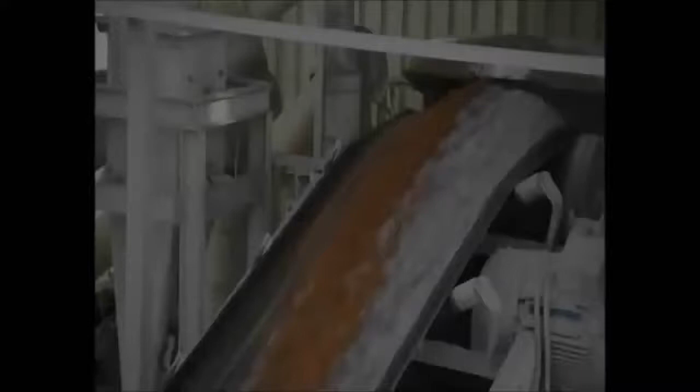Concrete. It's the most used building material on Earth. It was the building block of the Roman Empire. Today, it's the material for a new generation of gravity-defying skyscrapers. The raw ingredients that create this magic formula can be found in nearly every country on Earth.

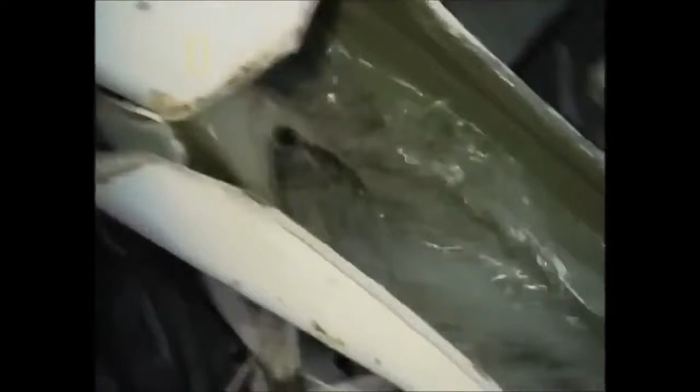Yet how these simple components are mixed together can make the difference between tragedy and triumph. From the mundane to the massive. From the ordinary to the extraordinary. Concrete helped pave the way for innovation and laid the foundation for the world's greatest civilizations. Now, go inside the science of concrete.

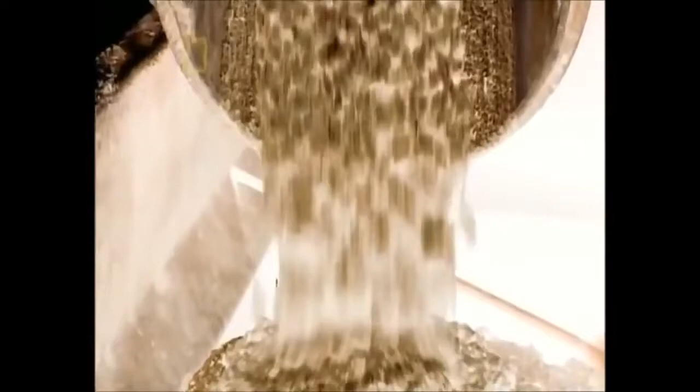It starts out like liquid. When it dries, it becomes stone hard. This amazing metamorphosis has earned concrete the nickname liquid rock. It has served as a cornerstone of engineering for centuries. And it's a highly prized tool of construction for a reason.

It's easy to take concrete for granted. People see it in sidewalks and roads all the time, every day. But in fact, it is the closest thing to a miraculous material in construction that we've ever had. Concrete is everywhere. It has an almost unlimited engineering potential. It can take on nearly any shape and forms the backbone of a variety of the world's construction.

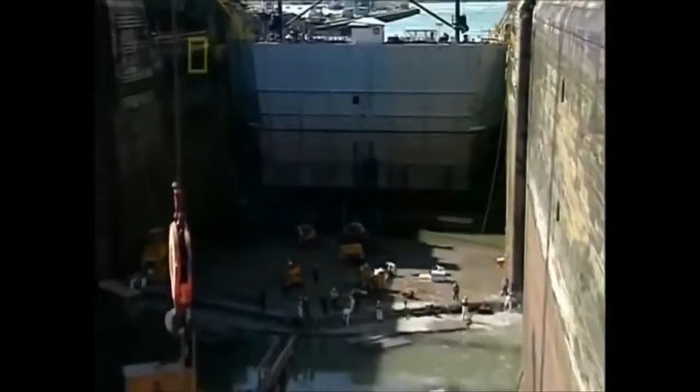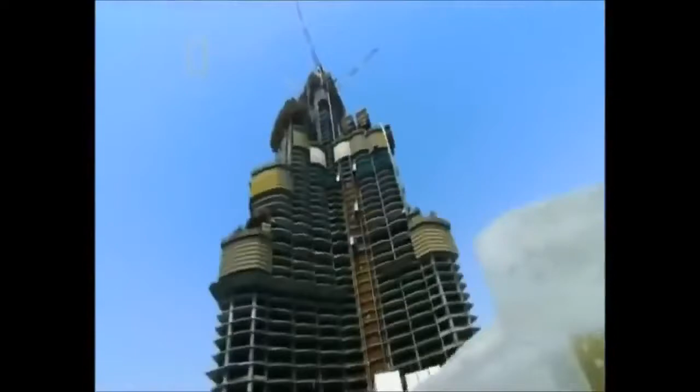Superhighways, massive bridges, man-made waterways, mega dams, the world's tallest skyscrapers. This miracle material begs the question, how does it do it all? I worked on a lot of jobs, and basically they all have a different formula for their concrete. Now, I can't imagine the world without concrete.

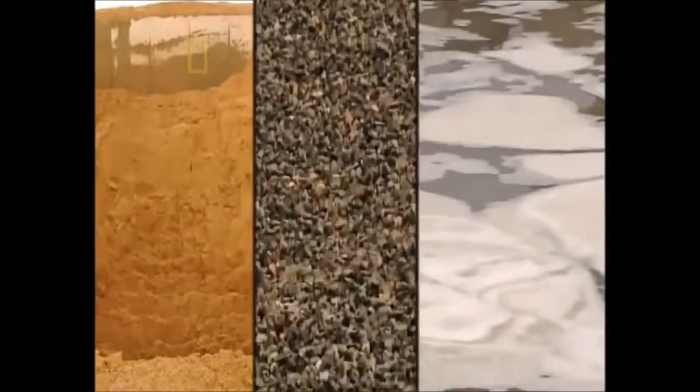The basic formula for concrete is simple. Sand, crushed rock, called aggregate, water, and the heart of the concrete mix, cement. Cement, it is the grey, powdery material that acts as a glue that sticks all of the concrete together. It covers and coats all of the gravel, the sand, and the rock as a way of gluing and binding the whole material together.

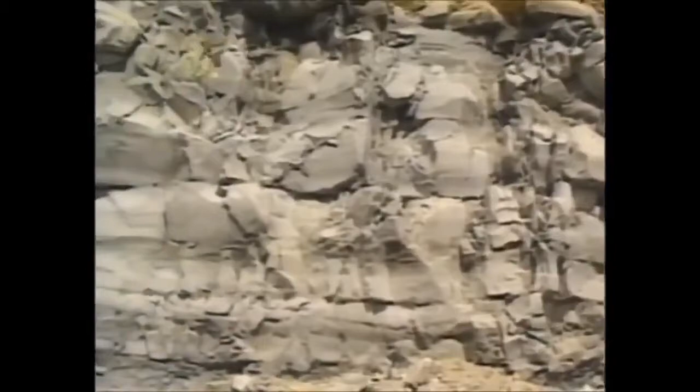To make cement, you need limestone, clay, and other elements like iron. These ingredients are crushed and combined into a powder that's poured into a kiln. The massive cylindrical spinning kilns heat the mixture to a temperature as high as 2,700 degrees Fahrenheit. The mixture becomes partially molten, forming a new marble-sized component called clinker. Once cooled, machines grind clinker into a superfine powder we know as cement.

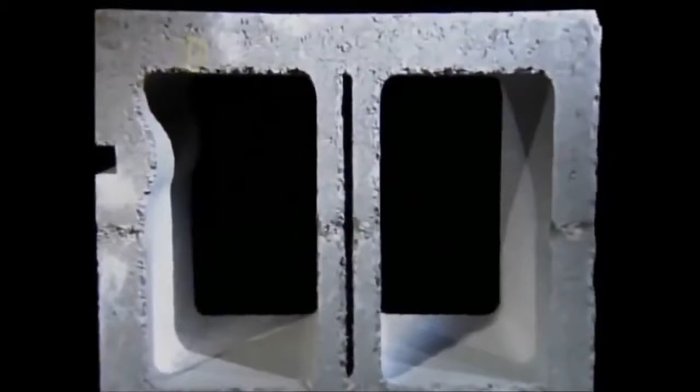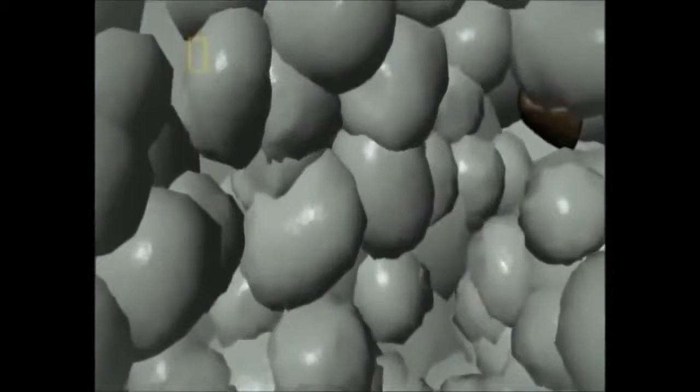Cement binds the ingredients together. When added to sand, water, and crushed rock, the cement reacts, linking the raw elements into one powerful whole. Water is the key. When cement reacts to the water, it undergoes a transformation called hydration. During this reaction, a node forms on the surface of each cement particle. The node grows and expands, linking up with other nodes. It sticks to the crushed rock and sand in the mix. Cement binds these ingredients. As it solidifies, concrete becomes a building block of modern construction.

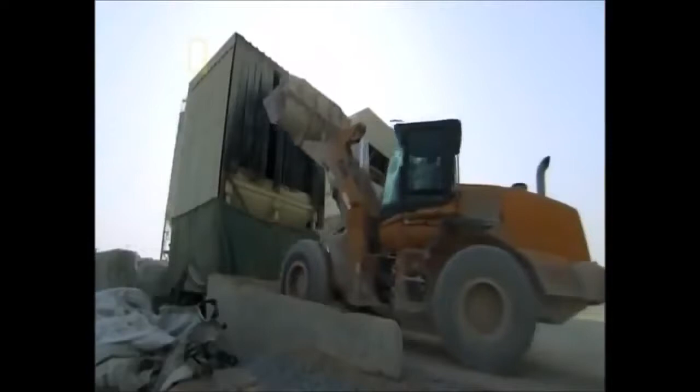This basic process hasn't changed in over a century. But creating concrete is no simple matter. Making the right recipe requires precision and flawless preparation. It is a synergy of ingredients and timing.

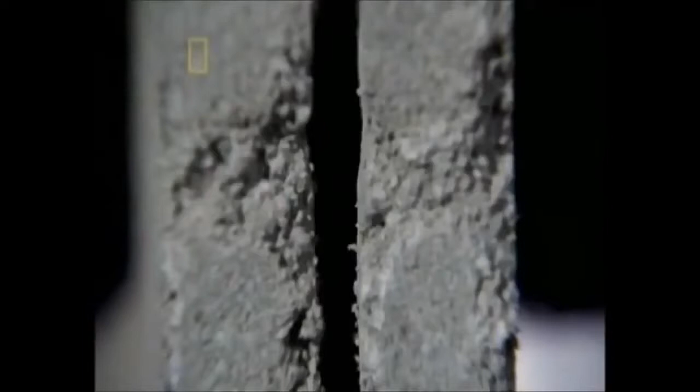In a way, making concrete is like making a cake. There are lots of different recipes to make a cake. You get different flavors, different colors, different textures, but there are also lots of ways that you can make a cake wrong. It's not going to set properly, or it can come out in a way that's very different from your intentions. Getting the recipe right is everything, and the consequences of a flawed mix can be deadly. The residents of Mexico City learned this the hard way.

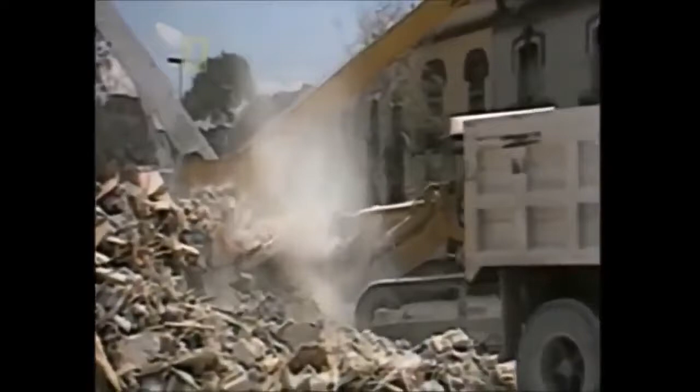On September 19th, 1985, the Mexican capital is rocked by an 8.1 magnitude earthquake. It causes up to $5 billion in damages. Investigation of the rubble reveals that many of the buildings had been made of a substandard concrete.

Yes, we saw examples after the Mexican earthquake where when you use inferior concrete and you skimp on the rebar, and we saw both extensively in Mexico City, the concrete doesn't have its expected strength. The result is walls would fracture and shear and the building would collapse when the expectation would have been that the building should have easily survived to preserve health and safety. The consequences of this quake are tragic. An estimated 10,000 die. Another 50,000 are injured.

But with the right formula, structures made of concrete can endure thousands of years. Although other civilizations, including the Egyptians, experiment with concrete, the Romans transform it from a supporting material to a main substance. In Rome, liquid rock fuels the dreams of an empire. The word concrete even originates in Rome. From the Latin concretus, it means grown together or compounded.

Roman concrete contains the traditional ingredients of sand, water, and crushed rock. But volcanic ash from the hills of Pozzuoli, Italy, transforms the material. The Romans were very astute architects and engineers, and they recognized that by mixing volcanic ash from Lake Pozzuoli in Italy, they were able to get a concrete that became very hard.

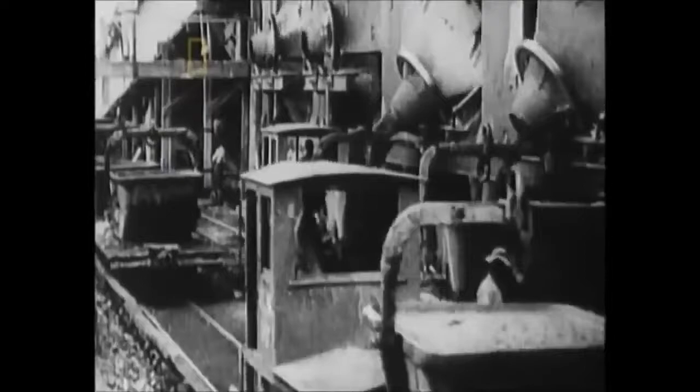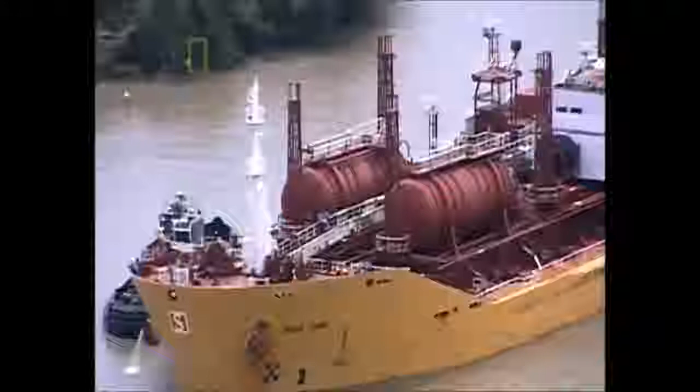Nearly 2,000 years later, builders would ask an almost impossible question. How do you conquer the land mass between two oceans? It holds more than 52 million gallons of water. It cuts a path straight through the heart of a nation. It is safely navigated by more than 12,000 ships every year. The Panama Canal. It's not one of the world's great rivers. It's an entirely man-made waterway. And the material that controls this much water is liquid rock, concrete.

By the late 19th century, the idea of a canal connecting across the isthmus somewhere in Central America had been floated for some time. Before its construction, a trip by boat from New York to San Francisco meant sailing 13,600 miles and crossing through the deadly waters of Cape Horn.

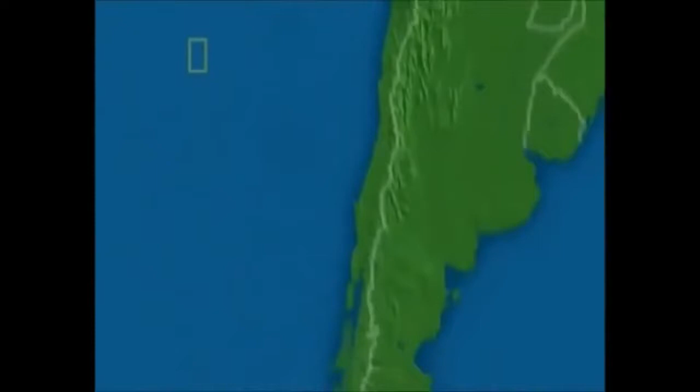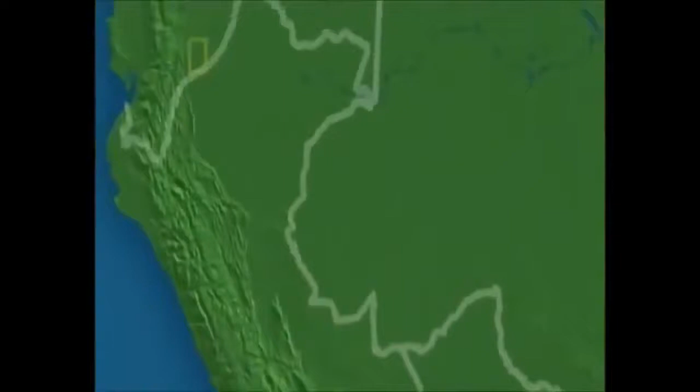The importance of the Panama Canal cannot be underestimated because before it existed, all shipping between the Atlantic and the Pacific Ocean had to take place by going around Cape Horn, which is very treacherous, with very severe storms for many months of the year, and many ships have been lost. The massive storms along the Horn had been sending skilled sailors and precious cargo to the depths of the ocean. The world needs a better route, a safer route. February 1st, 1881.

Ferdinand de Lesseps, the architect who crafted the Suez Canal in Egypt, decides to build another waterway through the country of Panama. Standing in his way are 51 miles of dense tropical jungle, torturous heat, and the fortress-like walls of Panama's central mountain range. How do you cut through the Continental Divide?

Unfortunately, they hadn't talked to the rock. If the devil could have designed a material to plague poor de Lesseps, he would have made this material. As soon as you expose it to air, it oxidized. You'd excavate, and it would slide in. It just ended up to be an impossible project.

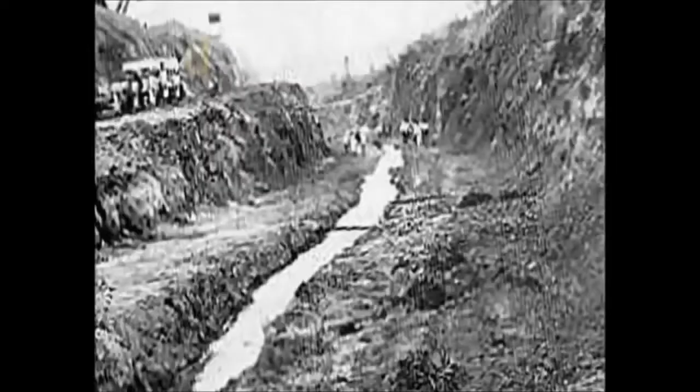De Lesseps' Panama Canal project quickly meets with disastrous consequences. 22,000 workers die due to landslides, tropical disease, and dynamite. After 8 years, the French abandon the canal project. But the French failure is not simply due to disease and the mounting death toll. From an engineering standpoint, their plan is flawed.

With the American economy booming, an ambitious young nation takes over the canal project. President Teddy Roosevelt decides that U.S. workers are up to the task. American engineers learn from the French mistakes. The French tried to carve out a sea-level route through the difficult terrain, just like the Suez Canal. Instead, Americans use a series of chambers known as locks.

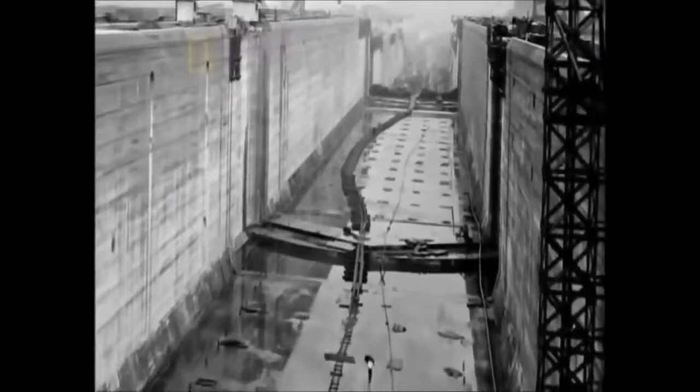Locks are simply big concrete tubs that you put between two bodies of water that have different elevation. You put a concrete tub between them, and the tub has got to be higher than the highest water. And then you put doors on each end of the tub, watertight doors. These chambers with doors fill with water, allowing ships to rise in steps. The ship crosses an artificial lake, then descends along a series of locks to the other side.

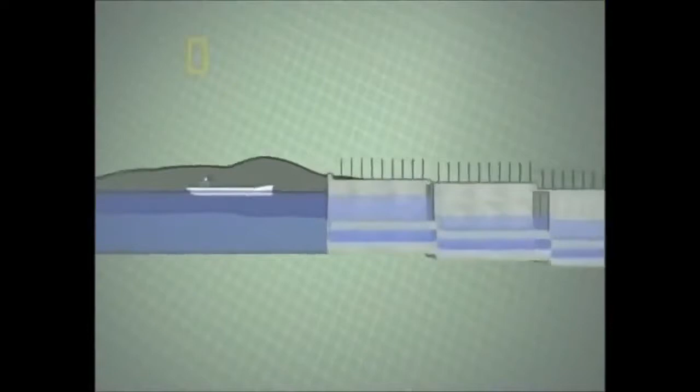It's just a concrete tub with doors on each end that raises things from low water to high water, or the reverse works just fine. You open the high water end, sail in the ship, close the doors, turn on the pipes down here, the ship settles down to the low level, open those doors, and off you go.

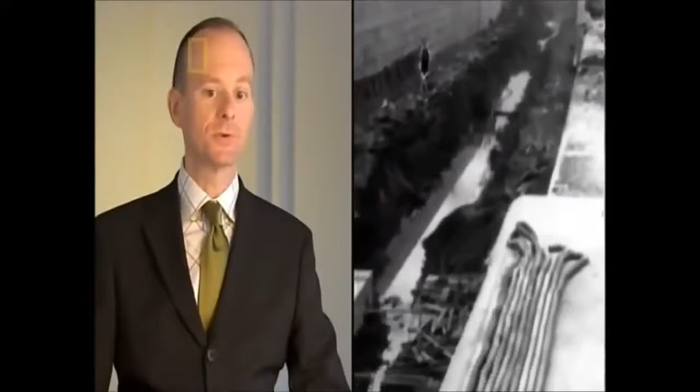With enough concrete, they hope to dam the Chagres River. By redirecting the river, they will feed the artificial lake and fill the locks. And the best option for the locks is liquid rock. Without concrete, the Panama Canal would have been almost inconceivable. Certainly canals had been built before that. It's something that could be done, but at the scale that we were talking about, especially with the goals that they had in terms of timing, it would have been very, very difficult to do that without concrete.

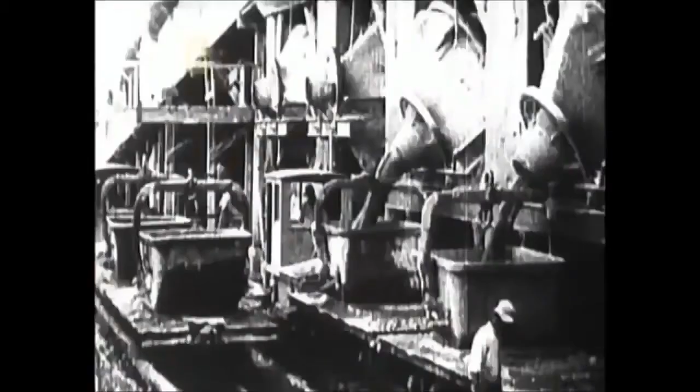The concrete locks will be a stairway bringing ships to the level of the lake. But they will need a high-strength concrete that can hold 26.7 million gallons of water for each lock. That's the equivalent of over 40 Olympic-sized swimming pools. Construction begins in 1904. About 4.5 million cubic yards of concrete were used in the construction of the Panama Canal. And because so much concrete was needed, they had to set 8 on-site batch plants in order to produce that much concrete.

Other materials, like steel or aluminum, can rust or corrode in water. The advantage of concrete is that water can make it stronger. Concrete needs water to complete its chemical reaction. If there's a little extra water around while it's going through the reaction, it just makes sure that all the concrete goes to completion in terms of its hydration. That's the chemical bonding caused by the water between the cement and the aggregate and the sand.

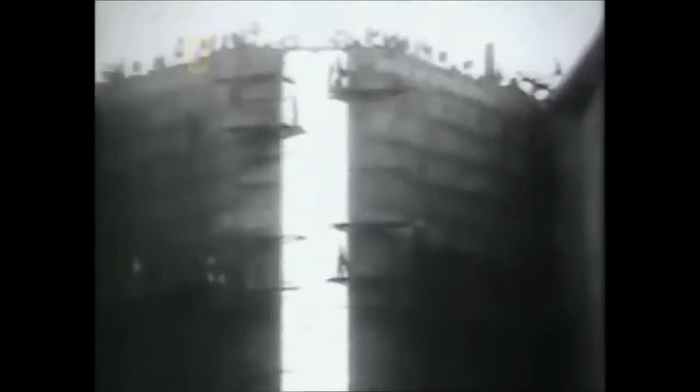In order to prevent leaks, the concrete mix for the locks has to be very dense, not allowing any water to seep through. The concrete that you need to build a canal is not the kind of concrete that you need if you want to design a skyscraper. The recipe for the locks will try to be leak-proof. To solve this problem, builders choose smaller rocks for the aggregate in the mix. Tests show that adding finer aggregate creates a less porous concrete. The goal is a leak-proof lock that only expels water when the doors open.

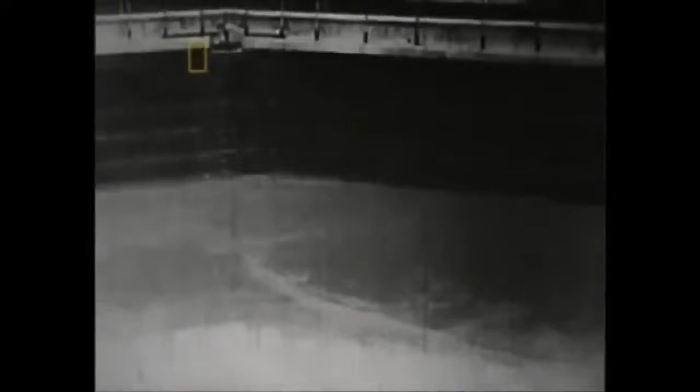With the mix just right, engineers begin building the locks that will control the waterway between two oceans. At the Gatun locks on the Atlantic side, each lock chamber is big enough to hold 3 Statues of Liberty, laid end to end, with room to spare. At these locks alone, workers pour more than 1.53 million cubic meters of concrete. These locks link to the artificial lake made by damming the Chagres River, Gatun Lake.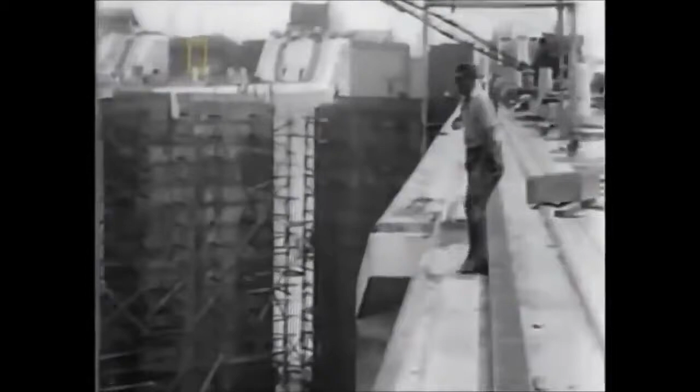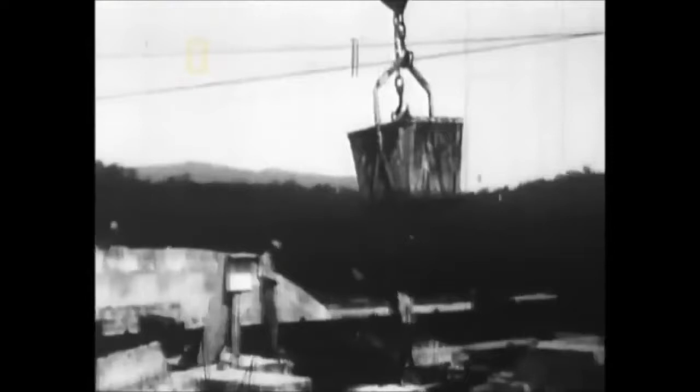9 years of construction. In May 1913, the last bucket of concrete is poured at the Gatun locks. Engineers prepare for the canal's first trial run. The tugboat Gatun travels through the locks on September 26th of that year. The locks work flawlessly and open for business 1 year later.

Few engineering endeavors have changed the geography of the planet like the Panama Canal. After nearly a century in action, the concrete of the Panama Canal has stood the test of time. No other material has withstood wear and tear in the same way. Concrete linked 2 oceans, but an even bigger challenge awaits. How will concrete tame one of America's wildest rivers?

Now go back inside the science of concrete. It has been called an American pyramid. The mighty Hoover Dam is a testament to the power of concrete. Weighing 6,600,000 tons, this concrete colossus holds back 45,000 pounds of water per square foot. The force of this water generates hydroelectric power for over 1 million people.

From the neon lights of Las Vegas to the freeways of Los Angeles, this hydroelectric dam generates 2,080 megawatts of electricity. The Hoover Dam's construction redefined what the world could do with concrete, but it also rerouted one of America's greatest rivers, flooding ancient canyons, reshaping the area's natural habitat.

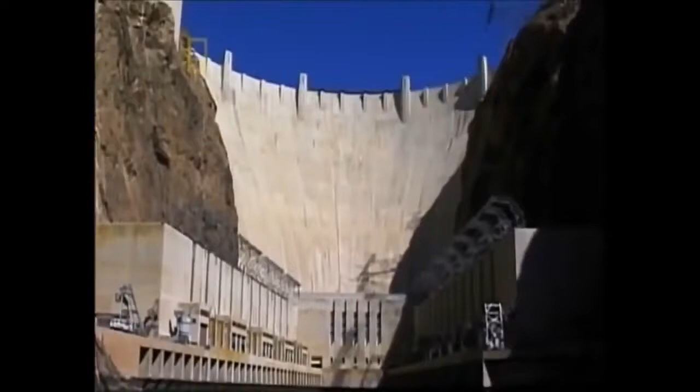The dam needs a material that is strong enough to hold back the raging Colorado. And since the location would be remote, able to be made on site. One material can meet all of those requirements. It's hard to imagine the Hoover Dam being built out of any material other than concrete. Using steel on this scale would be too costly. But to make the Hoover Dam, engineers would need more concrete than had ever been used before in one project.

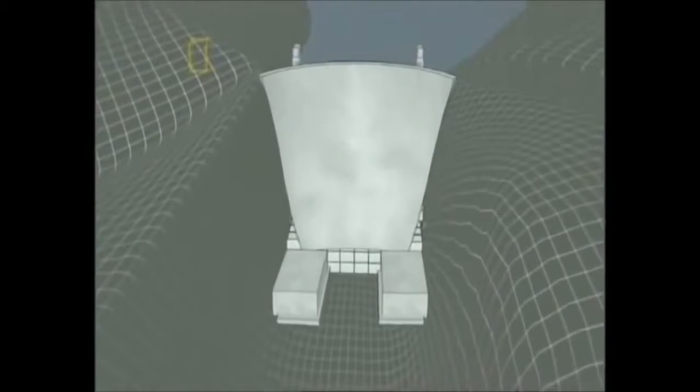The dam will be 726 feet high and 1,244 feet wide. With a structure this big, it will be impossible to do one massive pour of concrete. The amount of material that went into this dam was so enormous that there's no way to pour the concrete in one segment. So what they did is they divided the whole dam into lifts and then into individual blocks.

The Hoover Dam needs to be built as a series of individual blocks that will interconnect. Trapezoidal in shape, the blocks rise in 5-foot lifts. This crucial engineering element allows the project to progress in stages. Something on that scale being built in concrete had not been built before.

Hundreds of pounds per square inch, thousands of pounds per square foot on the base of the dam, trying to push the dam downriver. And now you've got the Hoover Dam to stand this incredible water pressure trying to push it down the river. Chief Engineer Frank Crowe knows the completed dam will have to hold back 45,000 pounds per square foot of water. For this, they need a special high-strength formula.

Crowe's solution? A minor but crucial modification to the standard concrete formula. A very dry mix, one that uses less water. More water makes it more workable, but shrinks more, and shrinkage causes cracks. The less water, down to 7%, the better and stronger the concrete.

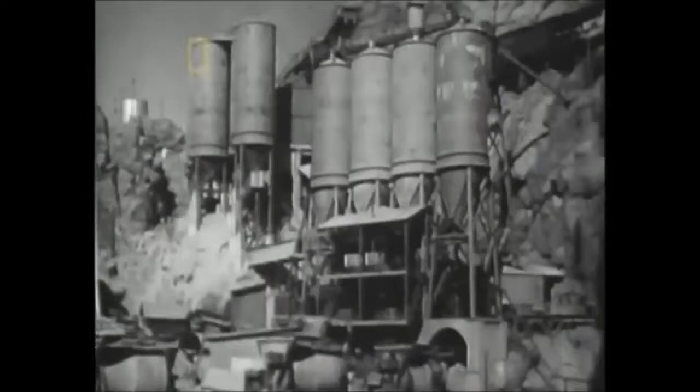The dam's remote location also means crews will have to build 2 concrete mixing plants on site. Shipping a very dry concrete formula from a facility far away would render it useless by the time it's transported to the dam. Because speed is of the essence when working with a very dry concrete mix, the crews working the pouring cranes have to push themselves to the limit to pour quickly and accurately.

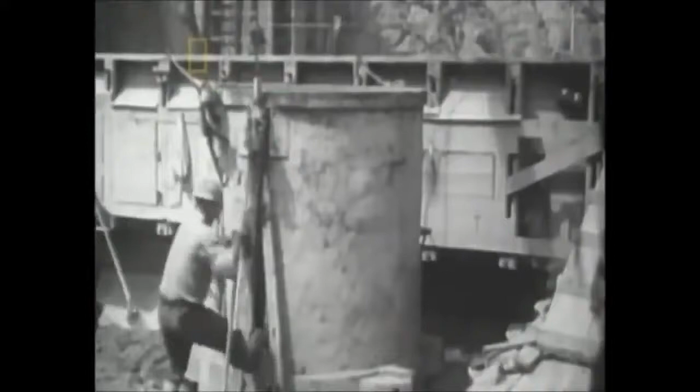When concrete cures, it gives off a powerful heat, a result of the cement and water reacting to make the rock-hard substance. The process by which concrete cures we call an exothermic reaction. By that I mean it gives off heat. And indeed, if someone pours a sidewalk or driveway around you, right after the slab dries enough to touch, put your hand on it. It'll feel warm. That exothermic, it gives off heat. You can feel sensible heat.

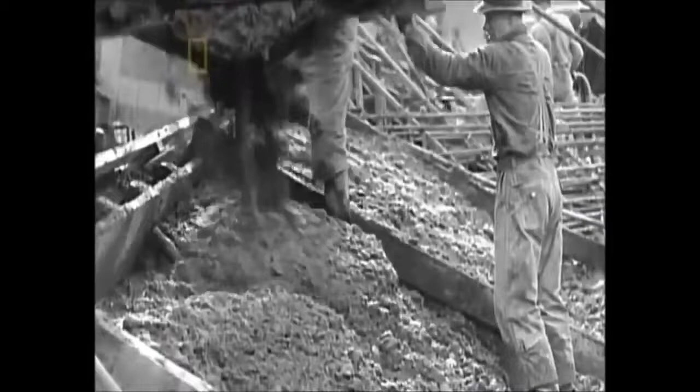As the amount of concrete going through this chemical reaction gets bigger and bigger, the amount of heat that's given off gets bigger and bigger. Engineers calculate that if the dam were built in one continuous pour, the concrete would get so hot that it would take 125 years for it to cool to normal temperatures. The extreme heat would also cause the concrete to crack and crumble away.

Concrete dries from the outside in. If the concrete is not evenly cooled, it can crack, putting the stability of the whole structure at risk. Instead, Frank Crowe and his team of engineers have an innovative solution. Each block is outfitted with coils of thin-walled steel pipe. When the concrete is first poured, water from the Colorado River circulates through these pipes.

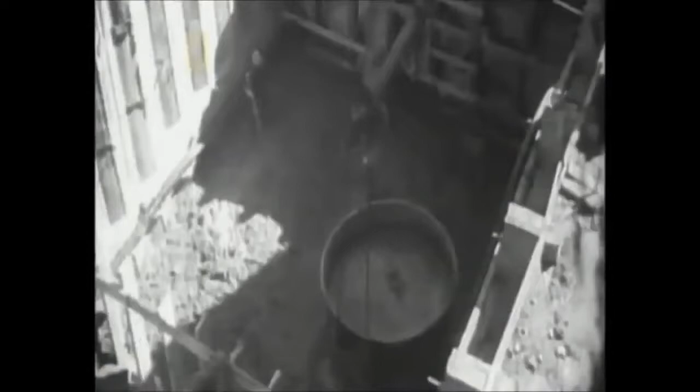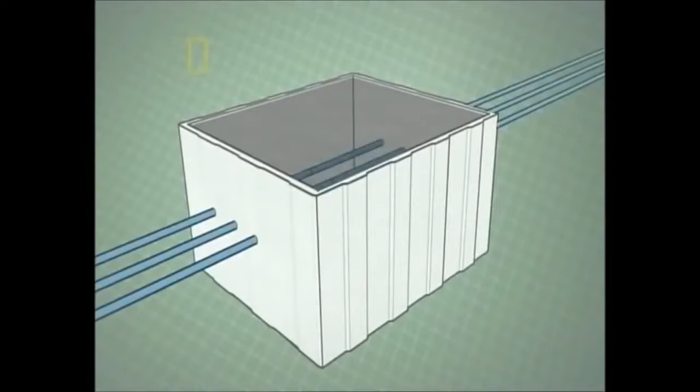The idea is to initiate a cooling process, but one done in stages. Cooling the concrete too quickly will cause it to crack. After the concrete has received its initial cooling, chilled water from a refrigeration plant is circulated through the coils to finish the cooling process. As each block is cooled, the pipes are cut off, and they are filled with grout by pneumatic grout guns, pumping 300 pounds per square inch of filler.

Once the individual blocks have cooled and set, there is one final challenge. In order to prevent the hairline fissures between the blocks from weakening the dam, the individual blocks are formed with vertical interlocking grooves. When the concrete has cooled, grout is forced into these joints, bonding the entire structure into a monolithic concrete giant. This method takes advantage of one of concrete's fundamental properties. Concrete as a material is very strong in compression.

To build a structure, to make sure that the concrete is all in compression, you bend the beam like this, so now the water pushes on an arch. Well, what's the water trying to do? It's trying to push that through. Well, it's the Pantheon Dome again. Only this time it's the water trying to do it. It's trying to push the dome through the river gorge. What that does is put the whole structure in compression.

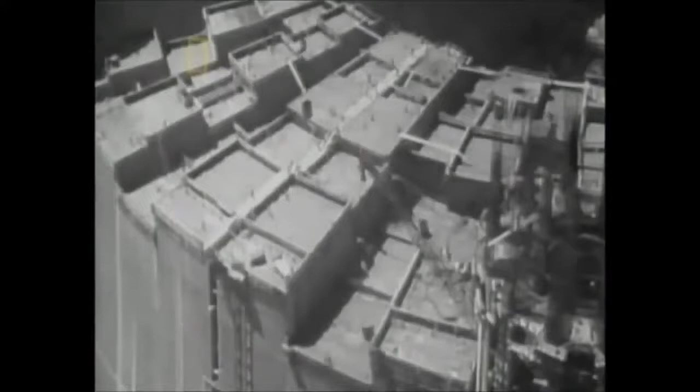Well, concrete loves compression. The more it is forced together while setting, the stronger concrete becomes. As a result of this property, the Hoover Dam is arguably stronger today than it was on opening day, 70 years ago. The Hoover Dam is a testament to engineering know-how and a skillful use of concrete.

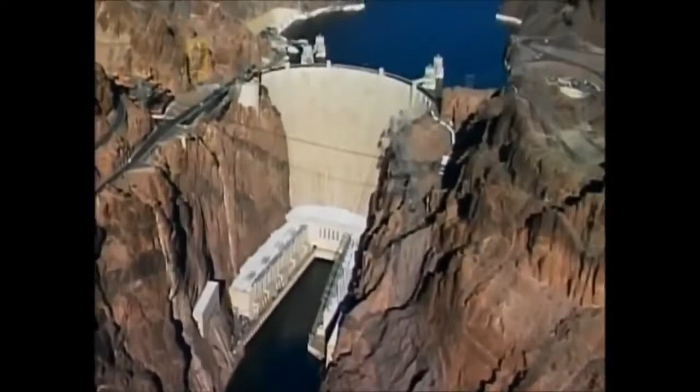The dam contains enough concrete to pave a strip 16 feet wide and 8 inches thick from San Francisco to New York. More than 5 million barrels of cement were used in the Hoover Dam, and a total of 21,000 men worked on its construction. And it represented an enormous engineering achievement to build successfully. It took the lives of over 100 men to build that dam.

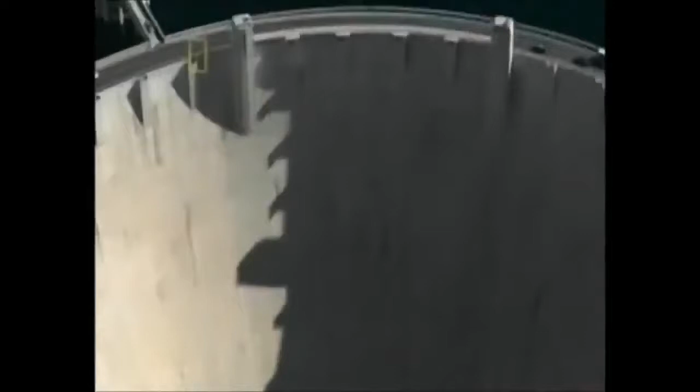Today, the concrete mega dam is nothing new. But Hoover set the stage and showed the world that concrete could do the job and help generate much needed power. It changed the course of one of America's wildest rivers. Now the question is, can concrete conquer the skies?

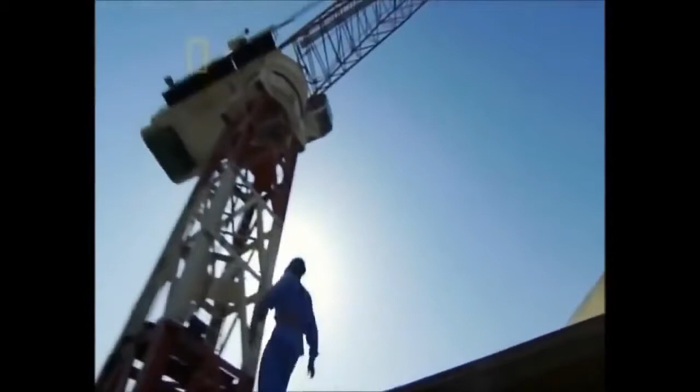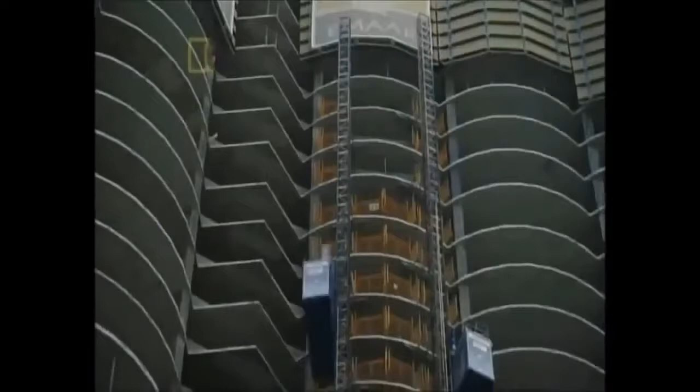In the scorching Persian Gulf, a growing structure cuts the horizon. Its expected height is a closely guarded secret, but experts around the world agree the Burj Dubai may be the world's tallest skyscraper. It'll be the tallest building, for sure, the overall title holder for some time to come. A construction project this massive needs 11 cranes and the world's fastest high-capacity construction elevators. The building rises at the breakneck pace of 1 floor every 4 days.

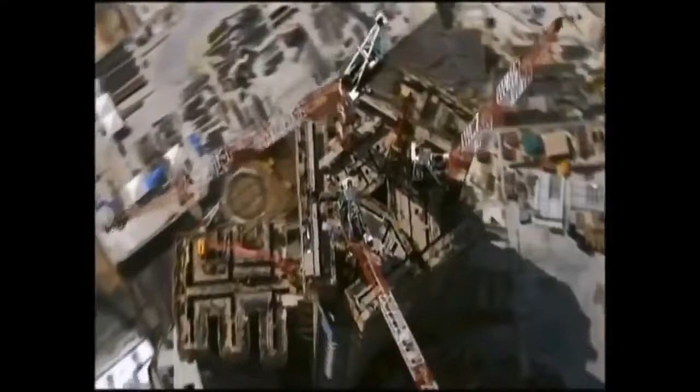And from the walls to the floors, to the columns to the stairs, much of this desert skyscraper is concrete. More than 160,000 cubic meters of it. At more than 2,000 feet, the Burj Dubai will be the crown jewel of the United Arab Emirates and is a shining example of a new generation of skyscrapers that seek to dominate the skies. It is a far cry from the humble beginnings of the concrete skyscraper, more than a century ago.

At the beginning of the 20th century, the building material of choice was not concrete, but steel. You can build a hell of a skyscraper with steel. In fact, the Empire State Building is so overbuilt, you could probably add another 30 stories to it under today's building codes, and it would still comply fine. So steel was a great material. You can build a great building from steel, but it's an expensive way to go.

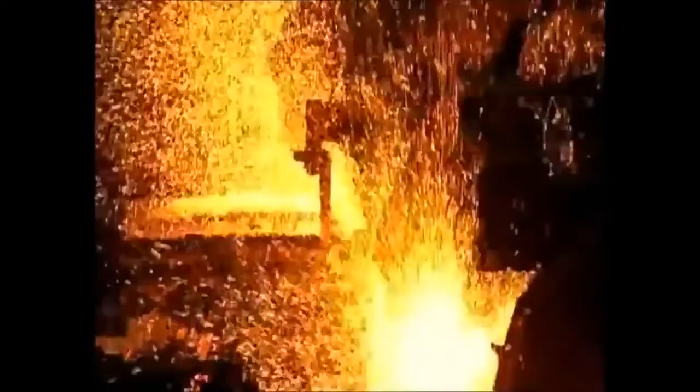And steel is not only costly, but represents a challenge for a new generation of skyscrapers that grow increasingly higher. And if you're going to go tall, the building's got to be stiff. It is so much easier to make those thick, stiff walls from reinforced concrete than steel that it's a no-brainer. The Petronas towers in Malaysia are concrete, and this new one in Dubai is going to be concrete. If you're going to go that high, it's going to be concrete.

The stiffness of concrete, combined with its availability and relatively low cost, have made it the building material of choice for these new skyscrapers. As our experience and comfort level with reinforced concrete came along, and as the buildings started getting taller, reinforced concrete really became the material of choice.

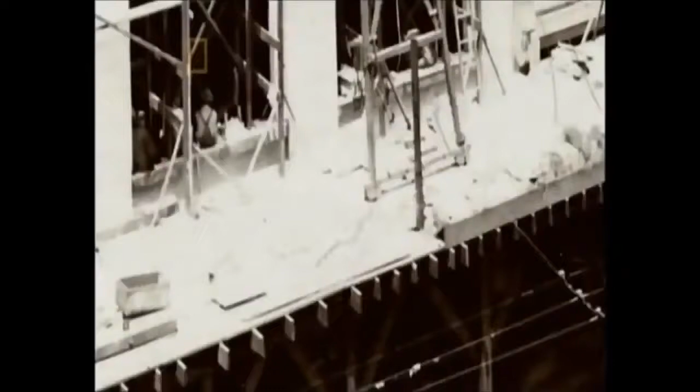Before 1902, the tallest steel reinforced concrete building is a paltry 6 stories tall. The Ingalls building in Cincinnati changes that. Engineer Henry Hooper dreams of a monolithic building of concrete, a skyscraper 16 stories tall. But many engineers believe that a concrete tower 16 stories high will collapse under strong winds or even its own weight. When Hooper finishes his building, there are many skeptics.

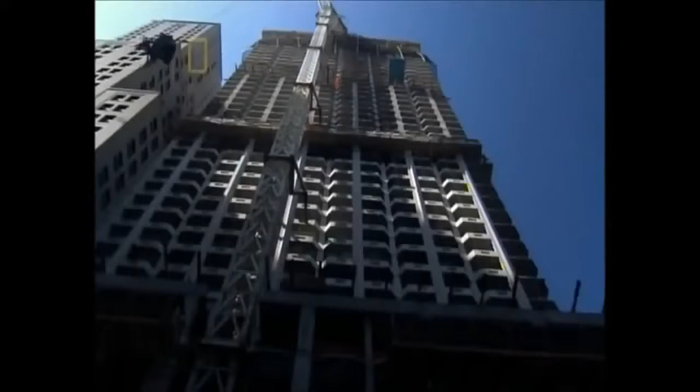There's one anecdote that says that a reporter actually stayed up all night waiting for the Ingalls building to collapse because he was so certain that it was going to. Needless to say, the reporter was disappointed in the end. It is a towering success for its time. But at 210 feet, it is just one in a dizzying array of modern-day skyscrapers. More than a century later, the towering dream of Dubai aims to be over 10 times the size of the Ingalls building.

Every morning, workers assemble in the garage of the building. Erecting this much concrete in the punishing heat of the Gulf requires serious manpower. But before workers can pour a drop, the perfect formula needs to be mixed at the batch plant. The first problem this leviathan from the desert faces is its own height. The taller a building, the more it flexes, increasing the likelihood that it could flex to the breaking point, a deadly proposition. Older skyscrapers like the Empire State are safe because they use massive steel beams and braces. But erecting a tower nearly twice as high requires a material with even greater shock-absorbing qualities.

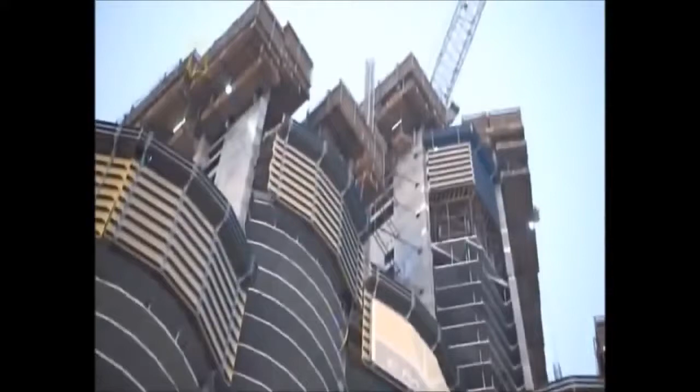If you take something like the Empire State Building and the wind blows on the Empire State Building, well, the wind creates pressure, which are going to try and bend the Empire State Building over. But as you go higher, imagine now going twice the height of the Empire State Building. The wind gets more surface to work on. Indeed, buildings collapse when the flex is so great that the weight of the building gets outside of its footprint and the building doesn't have strength enough to handle that. Down it comes. Builders will need a formula that is almost as strong as cast iron, yet more resistant to damage due to vibrations from the wind.

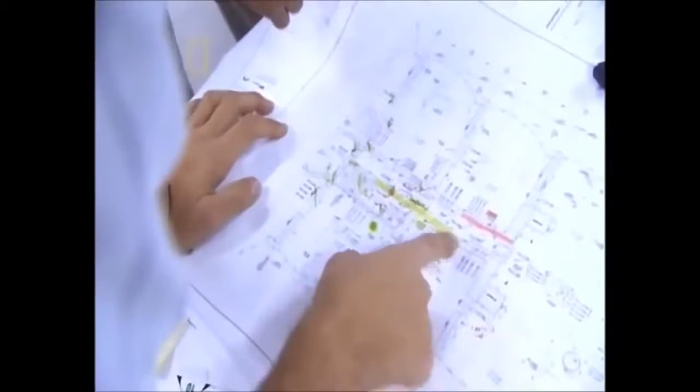After extensive computer and wind tunnel testing, the architects behind the Burj Dubai will use a high-strength concrete formula. It contains slag, a byproduct of the steel industry, and microsilica, which gives the concrete added strength. If you look at the microstructure of concrete, there are many, many spaces between the particles that are either hollow, so we call them pores, or they are filled with water. Microsilica plays the role of filling these pore spaces between, and therefore it makes concrete much more dense, more durable, and stronger.

And in order to make sure that the formula is consistent, Alam Feroz, quality control manager for the concrete of the Burj Dubai, routinely tests the concrete before it is used in the skyscraper. I'll give you an example. It's like if you're giving blood to a patient, so how important is the blood to be tested before you give it to the patient? It's a big risk. So same is with the concrete. When it has been tested, I get confident that whatever I'm giving to the structure is tested and it complies to the requirements. It won't be just a mere guess.

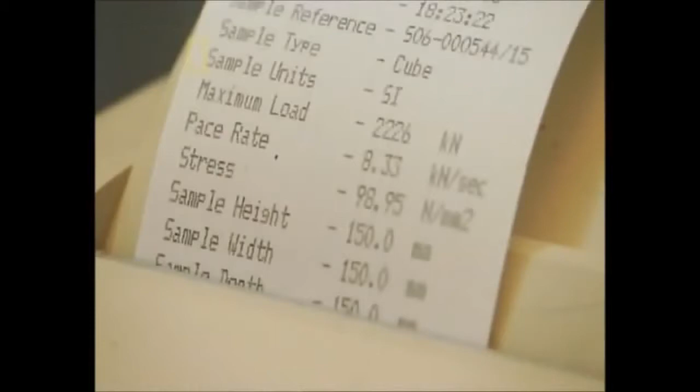To test the strength of the concrete, small cubes are hardened in cool water. Next, the concrete is deposited into a crusher for a stress test. This cube holds up to nearly 14,000 pounds per square inch, making it a high-strength concrete. The concrete test has been successful. But as strong as this formula is, it still has to contend with desert heat. Temperatures top 120 degrees. How do you keep concrete cool in the desert?

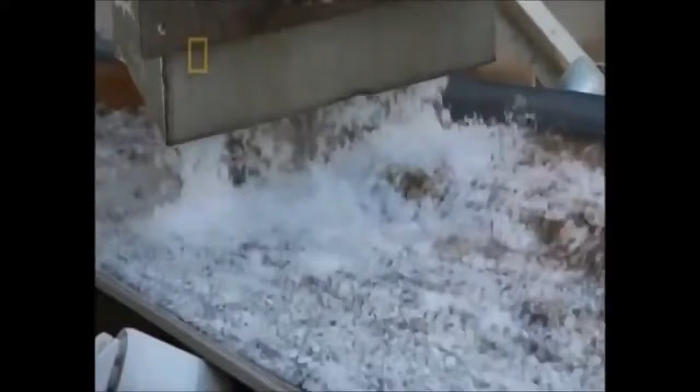But the building's guts are solidly concrete. When it's finished in 2008, the Burj Dubai will be the tallest building in the world. Like the Ingalls, the Burj Dubai has set the standard for its day, showing once again that concrete can be used in a variety of ways for the world's tallest buildings.

Now, reinforced concrete is establishing itself as a building material of choice for skyscrapers. Concrete has conquered the skies. Concrete's next quest: how to tackle the building challenges of the future.

Concrete has been a key ingredient in the construction of our civilization. It has been a fundamental part of our architectural past and is now paving the road for our future. Scientists are developing new formulas for concrete and are looking for ways to make it stronger, more environmentally friendly, and capable of doing things we never thought possible.

Back where it all started, at the heart of the Roman Empire, concrete has taken a new and exciting turn. Just a few miles from the Pantheon, the Jubilee Church, designed by architect Richard Meier, uses a new form of concrete. The church was commissioned by the Archdiocese of Rome to commemorate 2,000 years of Christianity.

For that, the building would need a material that was both ancient and modern, a material that would speak to the church's past and make a bold statement for the future. They would also need a material that would last the test of time. Concrete fits the bill. This church is remarkable for several reasons.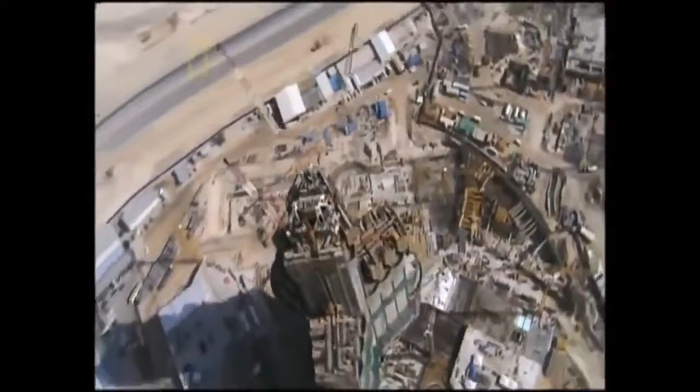New developments in concrete technology now allow for what used to be unthinkable: helping the environment by using an unusual aggregate: glass. The innovation here has been in making sure that the glass doesn't get corroded by the lime in the cement mixture. One of the biggest issues with concrete is that the Portland cement tends to be quite corrosive, and this has been a big problem with things like recycled glass. It tends to corrode the glass, and it falls out.

This composition of cement was actually developed by Columbia University. It is a much less corrosive, more benign cement, allowing you to put the glass chips in. So you can actually now have concrete with glass chips that actually has a good surface effect.

We are generating millions of tons of garbage, solid waste, and in New York City, approximately 6% of all solid waste is glass. That's bottles like this, yeah. And these bottles generally find their way into landfills. And that costs taxpayers hundreds of millions of dollars just to get rid of these bottles.

Concrete's versatility allows it to bind with other materials, in this case, glass. The first step is to separate the bottles by color. And then you crush them in a crusher. Now, crushed glass is something like this.

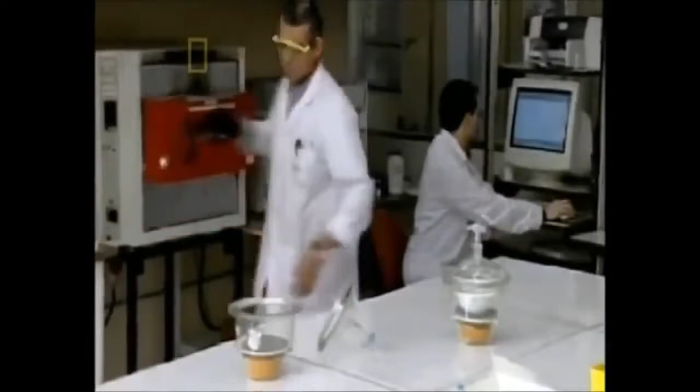So if you put this finely ground glass powder into concrete, you can replace part of the cement by this glass. These are actually 100% recycled glass pieces added into the concrete. Initially, scientists thought that recycled glass would make for a bad aggregate. But Professor Meyer and his team have found a way.

Okay, so once you make concrete out of these glass particles and color coordinate that very well, then you can get something like this, and this is now already being commercially produced. That's the way regular concrete would look. And this is here our glass concrete, polished to a high grade of polishing. That is known as terrazzo concrete.

Using recycled glass as an aggregate is just one of the many ways that concrete continues to reinvent itself. It also may pave the future for a more environmentally friendly concrete. There are also other developments reshaping concrete for the future. For the last 100 years, architects and builders have sought a way to allow light into concrete buildings, homes, and offices in a more efficient manner.

One of concrete's biggest drawbacks is that it creates dark buildings that do not effectively conduct light. Experts are working to change this. Okay, this is a piece of light transmitting concrete. It seems like an odd concept, but what they've done here is to take standard concrete and add glass fibers.

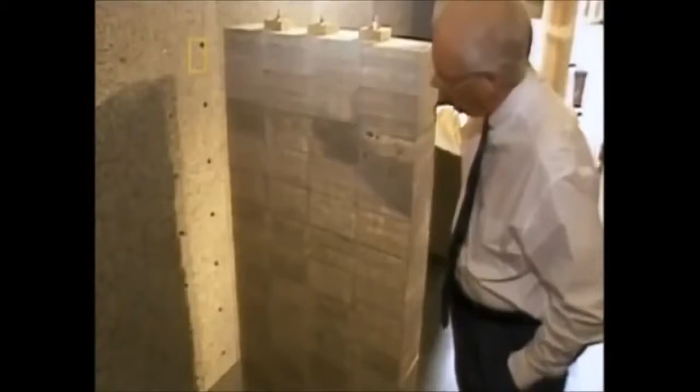Okay, so what you're seeing here is the blue LED passing through the glass fibers that are embedded in the concrete. Imagine concrete allowing light to pass right through it, or for someone to cast a shadow through a concrete block. This same thing can happen with normal daylight as well. So the idea is that you can build a structure with this concrete and allow daylight to actually come through the structural element of the concrete.

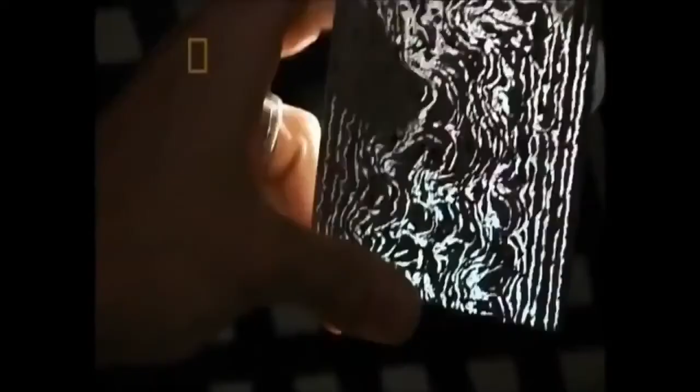Light transmitting concrete, or LiTraCon, is a unique form of concrete that uses glass fibers to conduct light. It allows for massive structures to permit light to shine through. This technology has the potential to redefine what concrete looks like. Once considered cold and impersonal, these new forms of concrete are transforming the material. What started off as the most basic of building materials is now on the cutting edge of building and design.

The future for concrete is virtually limitless. If concrete is anything, it is a material that continuously reinvents itself. Concrete continues to adapt to the emerging challenges of our world and is laying the foundation for our future.

Concrete. This innovation allows the Romans to craft an empire from the ground up. Concrete becomes the backbone of a dizzying array of structures, aqueducts, bathhouses, and markets. But today, one structure alone stands as a unique testament to the power of ancient Roman concrete: the Pantheon.

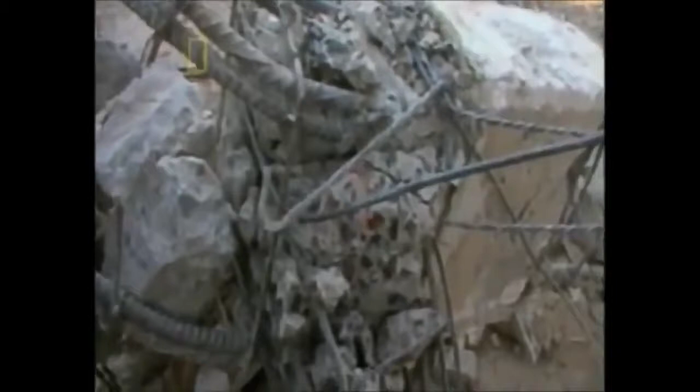Yes, we saw examples after the Mexican earthquake where when you use inferior concrete and you skimp on the rebar, and we saw both extensively in Mexico City, the concrete doesn't have its expected strength. The result is walls would fracture and shear and the building would collapse, when the expectation would have been that the building should have easily survived to preserve health and safety. The consequences of this quake are tragic. An estimated 10,000 die. Another 50,000 are injured.

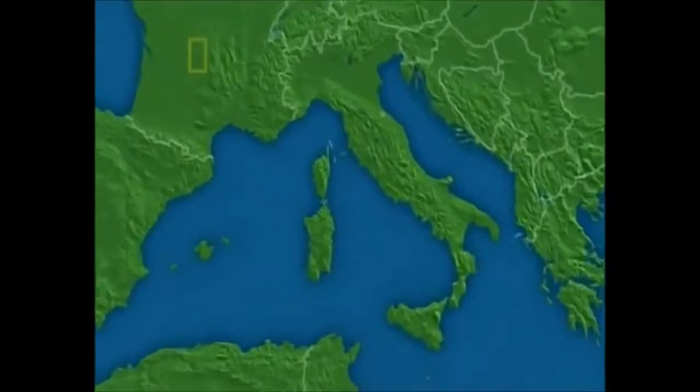But with the right formula, structures made of concrete can endure thousands of years. Although other civilizations, including the Egyptians, experiment with concrete, the Romans transform it from a supporting material to a main substance. In Rome, liquid rock fuels the dreams of an empire. The word concrete even originates in Rome. From the Latin concretus, it means grown together or compounded. Roman concrete contains the traditional ingredients of sand, water, and crushed rock. But volcanic ash from the hills of Pozzuoli, Italy, transforms the material.

The Romans were very astute architects and engineers, and they recognized that by mixing volcanic ash from near Pozzuoli in Italy, they were able to get a concrete that became very hard. This volcanic ash proves to be an adhesive binding agent. It gives ancient Rome a powerfully strong concrete. Massive bridges, man-made waterways, mega dams, the world's tallest skyscrapers. This miracle material begs the question, how does it do it all?

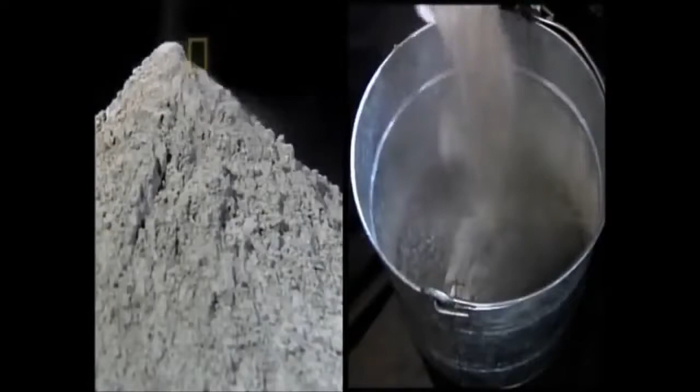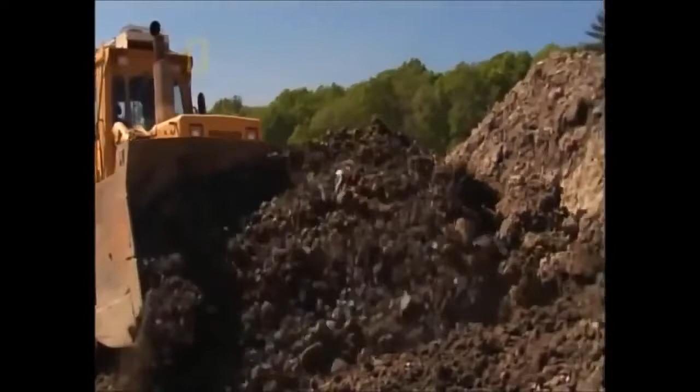I worked on a lot of jobs, and basically they all have a different formula for their concrete. Now I can't imagine the world without concrete. The basic formula for concrete is simple. Sand, crushed rock, called aggregate, water, and the heart of the concrete mix, cement. Cement, it is the grey, powdery material that acts as a glue that sticks all of the concrete together. It covers and coats all of the gravel, the sand, and the rock as a way of gluing and binding the whole material together. To make cement, you need limestone, clay, and other elements like iron.

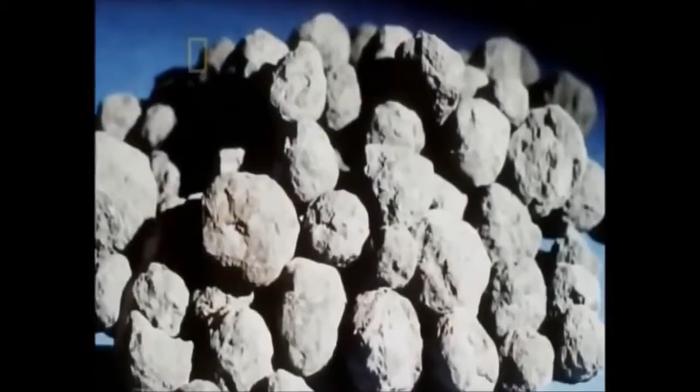These ingredients are crushed and combined into a powder that's poured into a kiln. The massive cylindrical spinning kilns heat the mixture to a temperature as high as 2,700 degrees Fahrenheit. The mixture becomes partially molten, forming a new marble-sized compound called clinker. Once cooled, machines grind clinker into a superfine powder we know as cement. Cement binds the ingredients together when added to sand, water, and crushed rock.

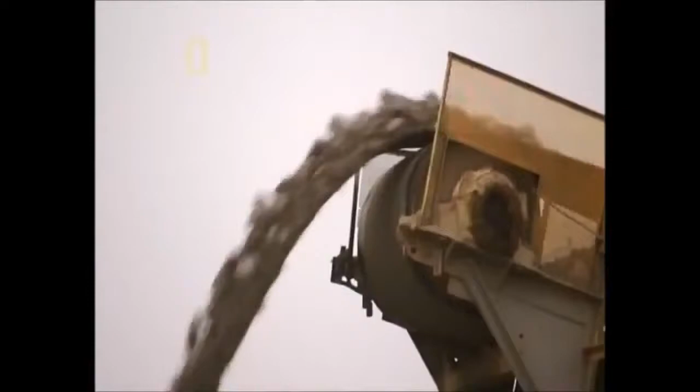Concrete. It's the most used building material on Earth. It was the building block of the Roman Empire. Today, it's the material for a new generation of gravity-defying skyscrapers. The raw ingredients that create this magic formula can be found in nearly every country on Earth. Yet how these simple components are mixed together can make the difference between tragedy and triumph. From the mundane to the massive. From the ordinary to the extraordinary. Concrete helped pave the way for innovation and laid the foundation for the world's greatest civilizations. Now, go inside the science of concrete.

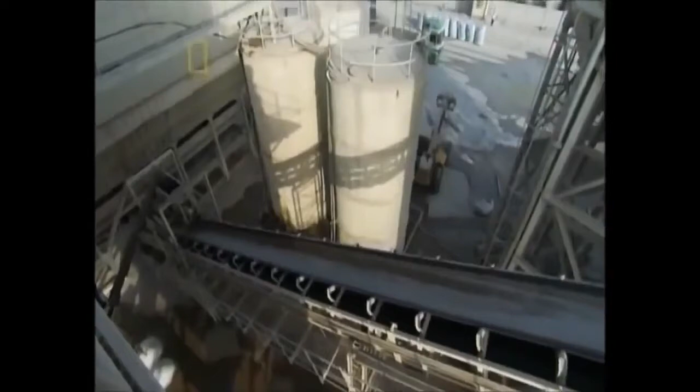It starts out like liquid. When it dries, it becomes stone hard. This amazing metamorphosis has earned concrete the nickname liquid rock. It has served as a cornerstone of engineering for centuries. And it's a highly prized tool of construction for a reason.

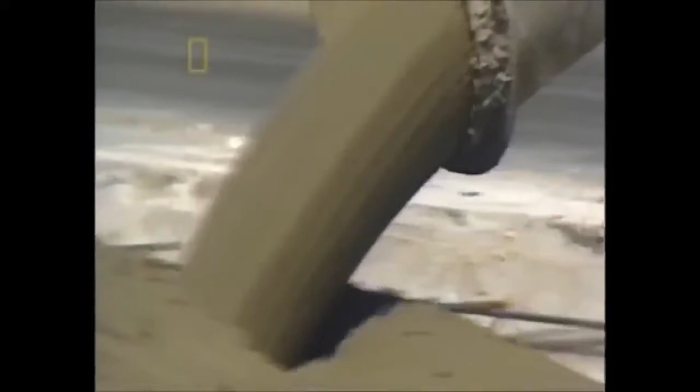It's easy to take concrete for granted. People see it in sidewalks and roads all the time, every day. But in fact, it is the closest thing to a miraculous material in construction that we've ever had. Concrete is everywhere. It has an almost unlimited engineering potential. It can take on nearly any shape and forms the backbone of a variety of the world's construction. Superhighways,